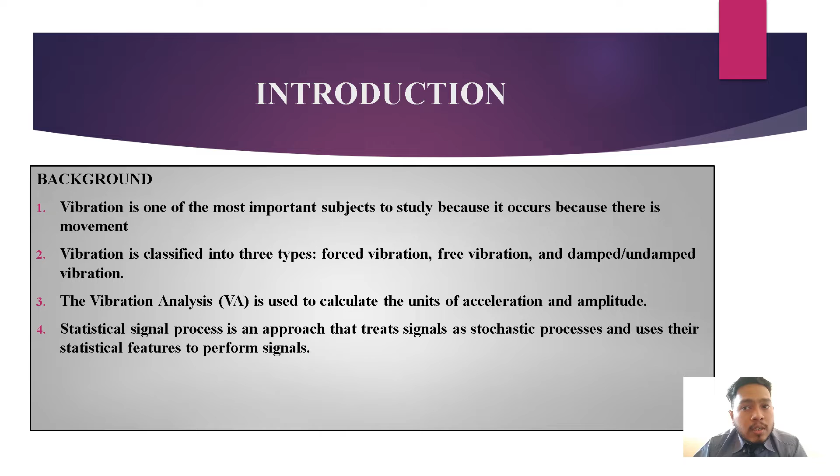Statistical signal processing is an approach that treats signals as stochastic processes and uses their statistical features to process signals. In signal processing applications, statistical techniques are widely used. For example, when you photograph an image, you can map the probability distribution of noise and build a technique using the image model to reduce noise.

Problem statement. Gears are the major element of rotating equipment and may be classified into three types: tooth, manufacturing method, and material. To identify a defective gear, it is nearly impossible to do so using simple human ears. Out of position and fractured gears are frequent gear defects that must be detected prior to failure.

When all the machinery parts and components are fully operational, noise and vibration may occur. In the long term, these conditions may have a direct effect on the regular operation of all of the equipment. Additionally, not everyone has access to appropriate equipment or machinery capable of tracking down a malfunctioning piece of equipment in a timely manner.

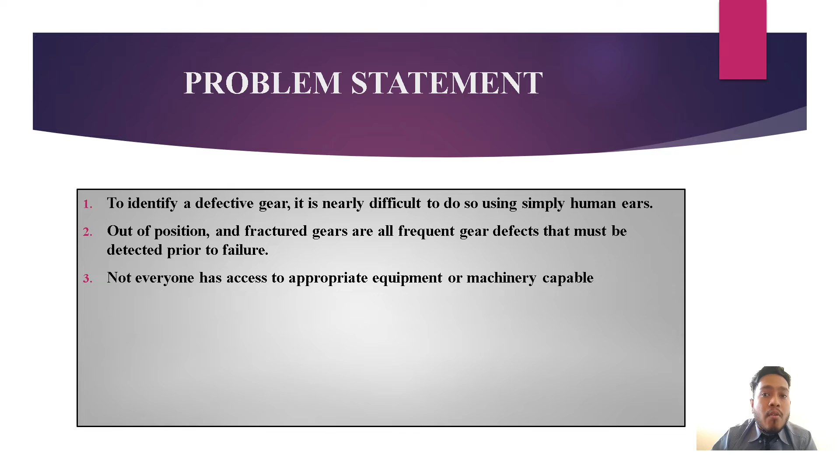Research objectives: to measure the vibration of normal and faulty gears using an accelerometer sensor. To analyze the vibration data of the gear via various vibration statistical analysis methods. Number 3, to verify the analysis done by R-square and data distribution method via Z-freq.

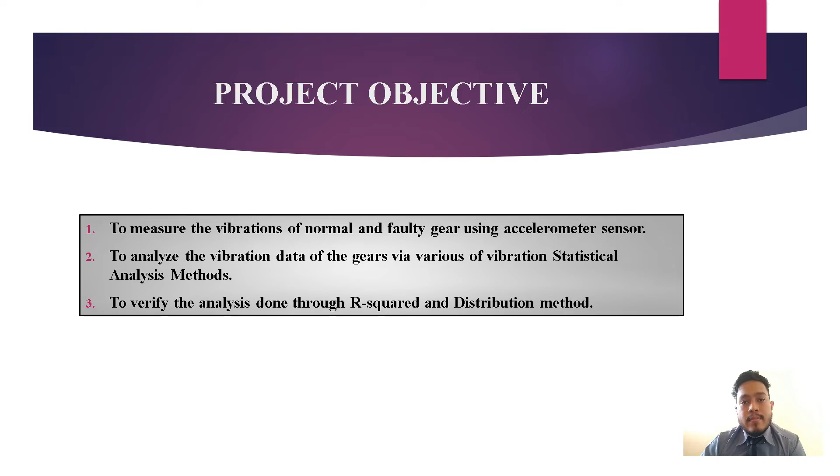Scope of research. The following are the scope of research in this faulty gear vibration diagnostics and monitoring. Helical gear and spur gear are utilized in this research. Two different gear situations were chosen for this research: a regular gear and a malfunctioning gear, in order to compare the outcomes between them. Create a simulation model in MATLAB.

Conduct a vibration analysis utilizing vibration signal analysis (VSA), the fast Fourier transform (FFT), time domain, the root mean square, and Z-freq coefficient.

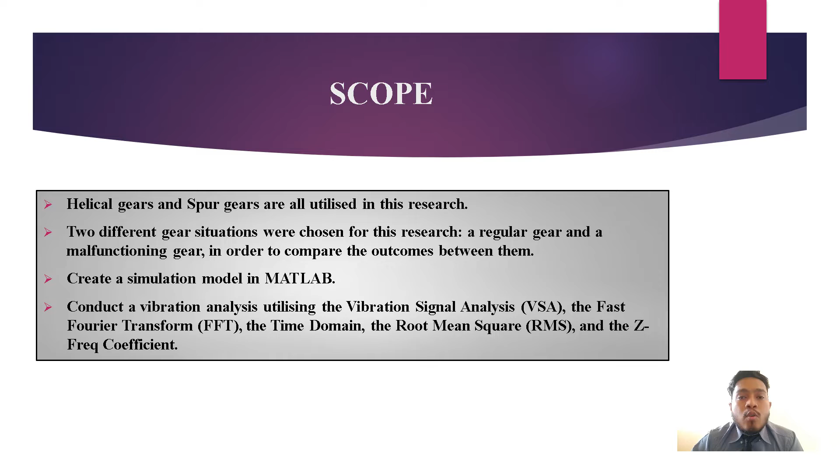Literature review on conducting monitoring and diagnostic fault detection, signal processing, and vibration analysis will be discussed in this chapter. These study references come from journals, books, and the internet. The goal of going over various articles about faults in spur gear and helical gear is to obtain a better grasp of how to conduct faulty gear vibration diagnostic and monitoring.

Gearbox fault diagnosis under different operation conditions based on time synchronous average and ensemble empirical mode decomposition, authored by Luyang Guan, Yimin Shao, Fengshou Gu, Bruno Fazenda and Andrew Ball. In this paper, a new method is proposed by combining ensemble empirical mode decomposition (EEMD) with order tracking techniques to analyze the vibration signals from a two-stage helical gearbox.

The method improves EEMD results in that it overcomes the potential deficiencies and achieves better order spectrum representation for fault diagnosis. Based on that analysis, a diagnostic feature is designed based on the order spectra of extracted IMFs for detection and separation of gearbox faults. Experimental results show these features are sensitive to different fault severities and robust to influence from operation conditions and remote sensor location.

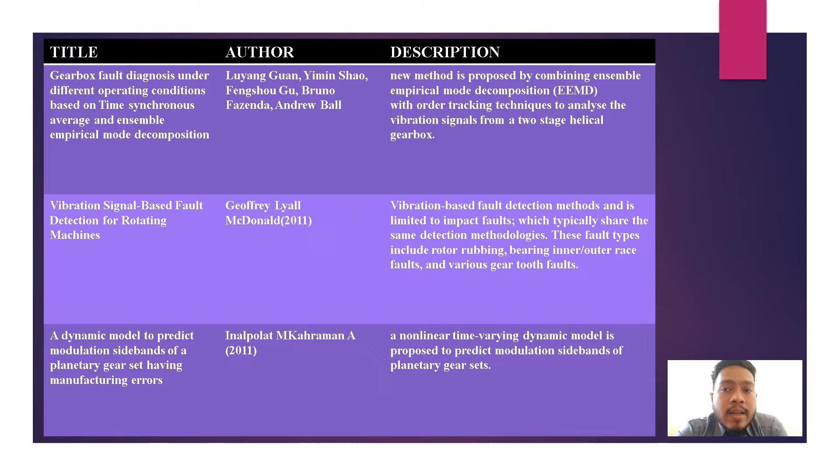The model uses gear mesh interface excitations that are amplitude and frequency modulated due to a class of gear manufacturing errors to predict dynamic forces at all sun-planet and ring-planet gear meshes. The flowchart shows the process of this research in figure 3.1.

As mentioned in the preceding chapter, the gear fault may occur over time. Consequently, if a fault has not been previously recognized, it becomes a serious concern whether the gear is failing or has failed. The cost of upkeep will be increased. There are a lot of explanations about how this research went from the start to the end in this chapter. It took a long time to find the best way to do this research.

There are programs called MATLAB that can help us do this vibration analysis on gear faults. We can use this program to take a model simulation from this vibration analysis. This chapter can also tell how well the vibration analysis works based on the method and the steps of this research.

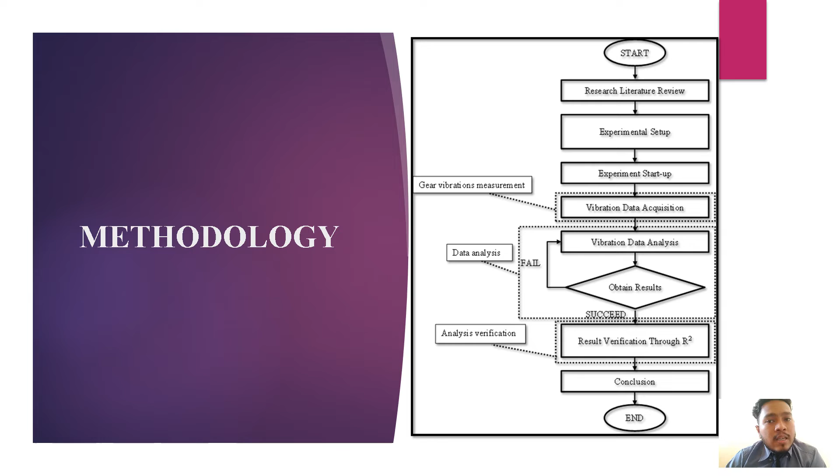Next, to figure out how vibration works, you need to use a MATLAB program to show how sound and vibration affect the part you choose. These parts are usually inside a transportation component. That is the experimental setup. The configuration utilizes two distinct types of gears, spur gear and helical gear. Normal gear and fault gear with multiple combinations of large and small gears. The result obtained was analyzed by vibration signal analysis with given parameters in MATLAB.

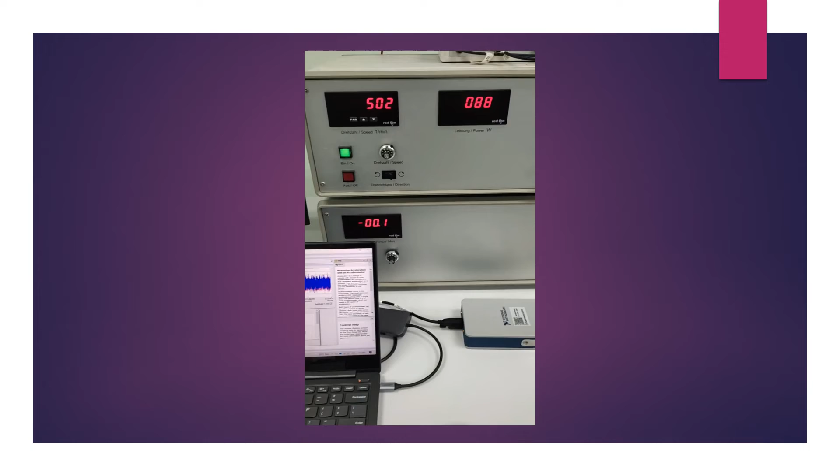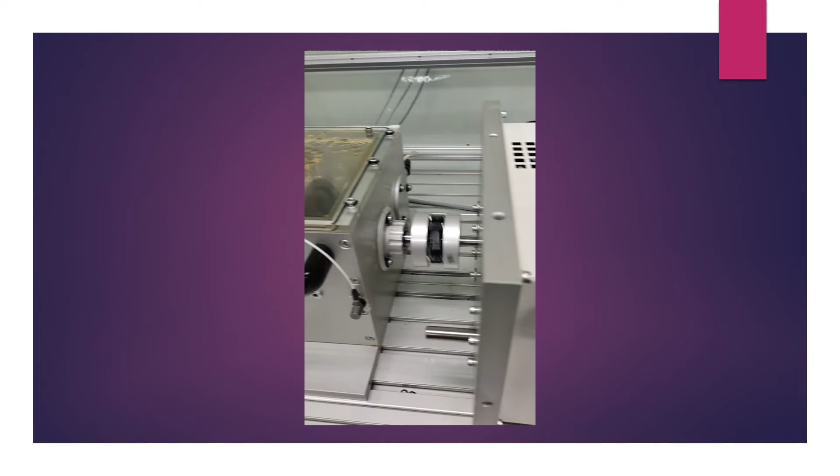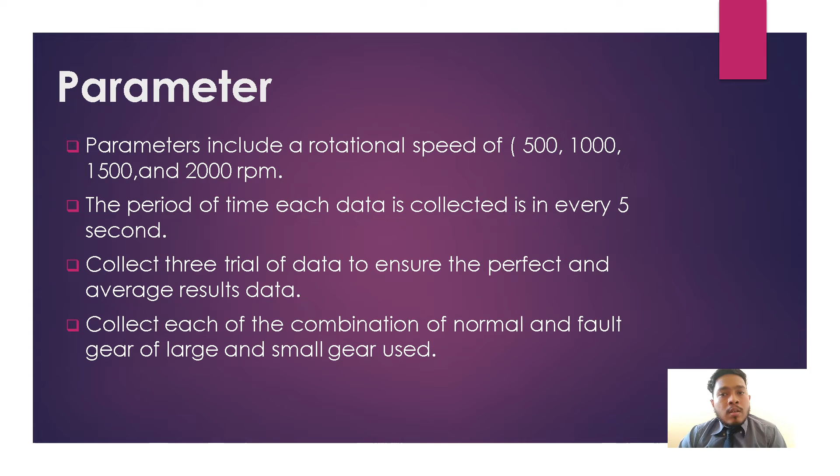The parameters used in this experiment include the machine's rotating speed, the sample rate, and the duration of the data collection period. Its purpose is to determine the difference in vibration between normal and defective gears. The data is taken during a 5-second period at a speed of 500, 1000, 1500 and 2000 rpm at which the machine must work. Spur gear and helical gear are utilized in this experiment.

Spur gear monitoring of time domain, frequency domain and Z-freq coefficient for this experiment. This experiment makes use of two sensors, sensor 1 and sensor 2. However, the time domain, frequency domain and Z-freq plots displayed below are from sensor 2 data alone. The particular sensor was chosen to represent the average outcome of the particular job. This is because the values of the data gathered from the two sensors are identical.

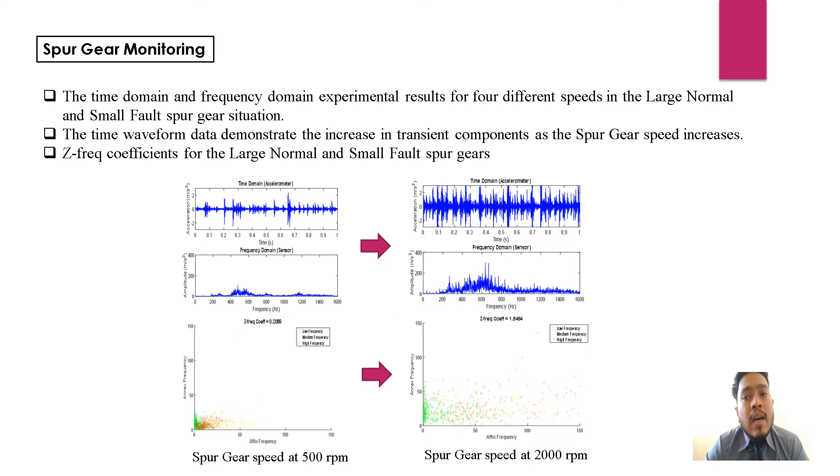Z-freq coefficient for the large normal and small fault spur gear can be seen as the gear speed increases. The red and yellow dots in particular expand over the Affix frequency. Additionally, all of the dots can be seen to split from one another at the high Affix frequency relative to the Annex frequency. Helical gear monitoring is also the same as we did for spur gear monitoring.

Sensor 2 is chosen to take the data alone. In this figure below, the time domain and frequency domain experimental results for 4 distinct speeds in large normal and small normal helical gear condition have been shown. The spikes of the graph also increase when the speed increases. The time waveform data demonstrate the rise in transient components as the helical gear speed increases.

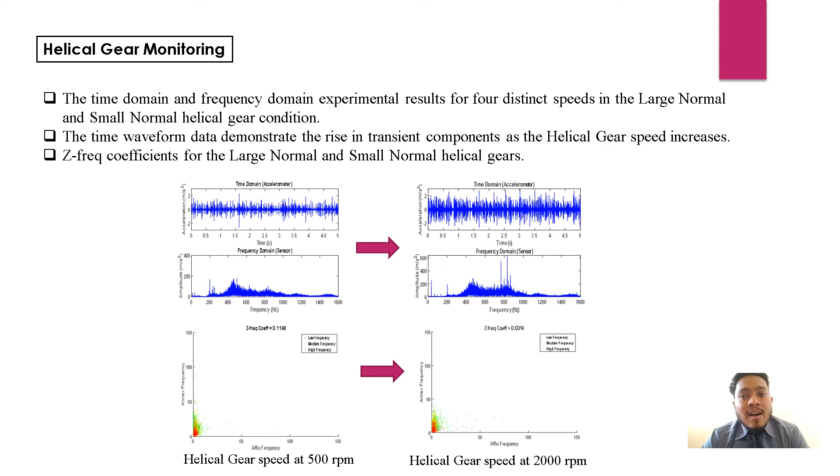The Z-freq coefficient for the large normal and small normal helical gear shows that as the gear speed increases, the green and yellow dots particularly expand over the Affix frequency. Additionally, all of the dots can be seen split from one another at the high Affix frequency relative to the Annex frequency.

In terms of root mean square, RMS, the figure below uses the data from sensor 2 to represent the average of the collected data. This is because the values of all the data collected from both sensors are identical. As for the trend depicted in the image, it indicates that the greater the running speed, the greater the RMS value. As the speed increases, the RMS value of both types of gear increases.

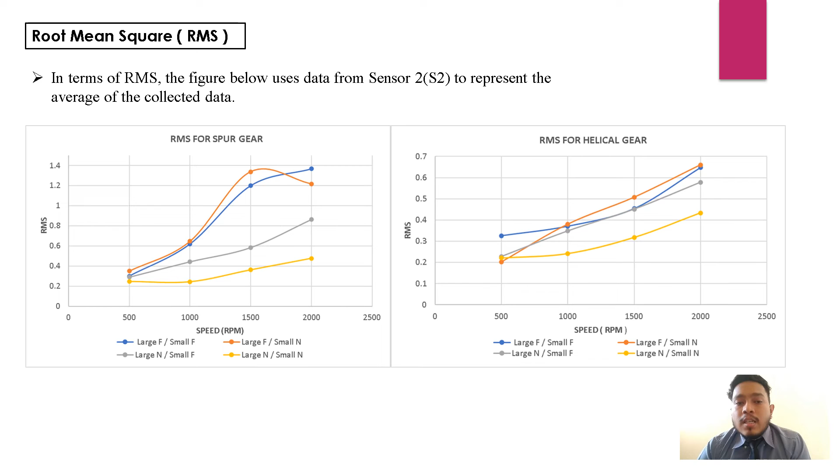Except the spur gear condition RMS for large fault and small normal, because at the speed of 1500 rpm, the RMS dropped from 1.3376 to 1.2172.

The Z-freq coefficient obtained is plotted in the figure below for each speed between 500 and 2000 rpm for the spur gear condition. For speeds between 500 and 1000 rpm, the Z-freq coefficient is nearly constant across all the conditions. The Z-freq fluctuation is illustrated for the large fault and small fault, and large fault small normal. This could be a result of the spur gear state being unstable. This is also suggested by the fact that the Z-freq coefficient increased significantly from 1000 to 2000 rpm.

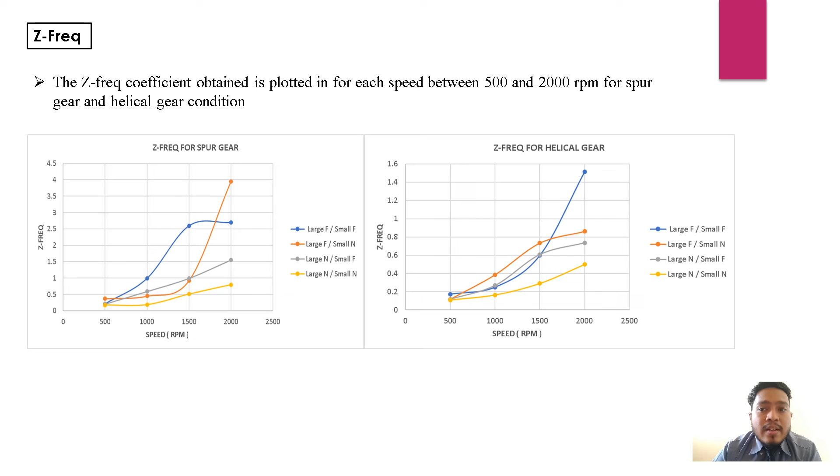The Z-freq coefficient obtained is plotted in the figure below for each speed between 500 and 2000 rpm for the helical gear condition. For speeds between 500 and 1000 rpm, the Z-freq coefficient is nearly constant across all the conditions. The Z-freq fluctuation is illustrated for the large fault and small fault only. This could be the result of the helical gear state being unstable. This is also suggested by the fact that the Z-freq coefficient increased significantly from 1000 to 2000 rpm.

R square is the statistical measure that indicates how near the data is to the fitted polynomial regression line. It's also known as the coefficient of determination, or in the case of multiple regression, the coefficient of multiple determination. The figure below shows that the data collected from each speed, RPM and Z-freq is used to make a comparison by the predicting statistical method.

The polynomial regression has an R-square value of 0.999, which is higher on the large normal and small fault spur gear condition, because speed increased significantly on constant gear vibration at the spur gear condition. Due to the fact that the R-square value exceeds 0.9, the data collected and analysis performed can be considered reliable in terms of predicting the outcome of the spur gear vibration.

The figure shows that the data collected from each speed, RPM and Z-freq is used to make a comparison by the predicting statistical method. The polynomial regression has an R-square value of 0.9999, which is higher on the large normal and small normal helical gear condition, because speed increased significantly on constant gear vibration. Due to the fact that the R-square value exceeds 0.9, the data collected and analysis performed can be considered reliable in terms of predicting the outcome of helical gear vibration.

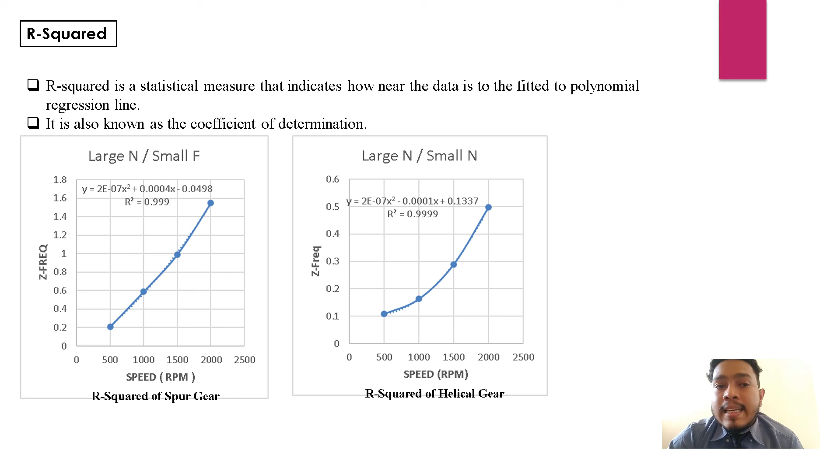Based on the distribution result from the figure below, it can be seen that speeds of 500 rpm and 1000 rpm have the closest accuracy among the other spur gear speeds, indicating an accurate distribution. The next speeds of 1500 rpm and 2000 rpm are of substantially lesser accuracy than the earlier distribution speeds.

Based on the distribution result from the figures below, it can be seen that speeds of 500, 1000 rpm and 1500 rpm have the closest accuracy among the other helical gear speeds, indicating an accurate distribution. The next speed is 2000 rpm, which has substantially lesser accuracy than the earlier distribution speeds.

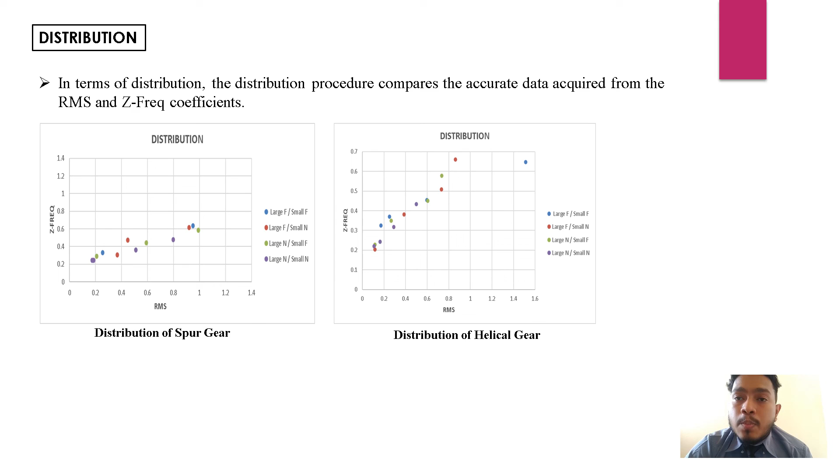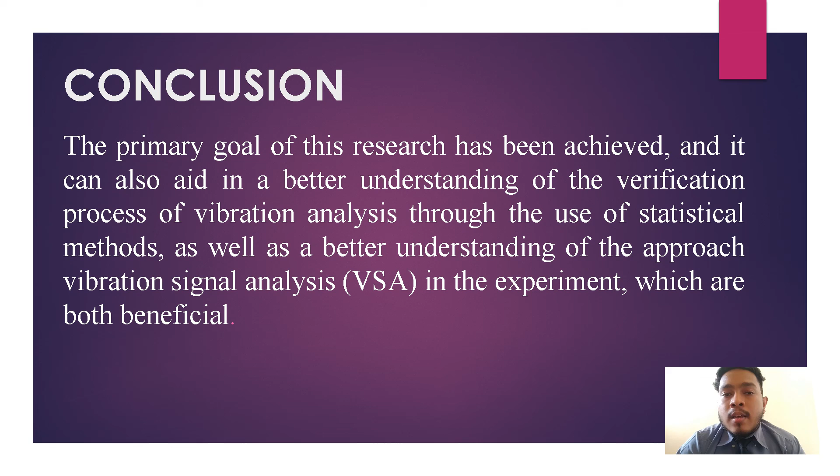The primary goal of this research has been achieved, and it can also aid in better understanding the verification process of vibration analysis through the use of statistical methods, as well as better understanding the vibration signal analysis approach in the experiment, which are both beneficial.

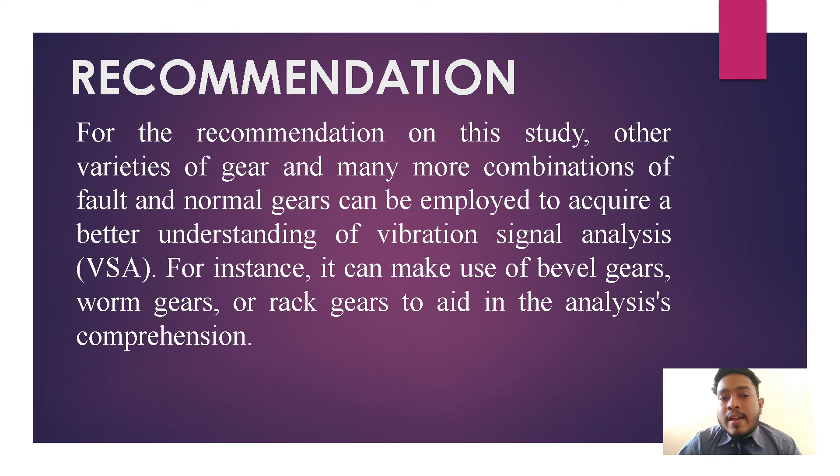As a recommendation for this study, other varieties of gear or many more combinations of fault and normal gear can be employed to acquire a better understanding of vibration signal analysis, VSA. For instance, it can make use of bevel gears, worm gears and rack gears to aid analysis comprehension.